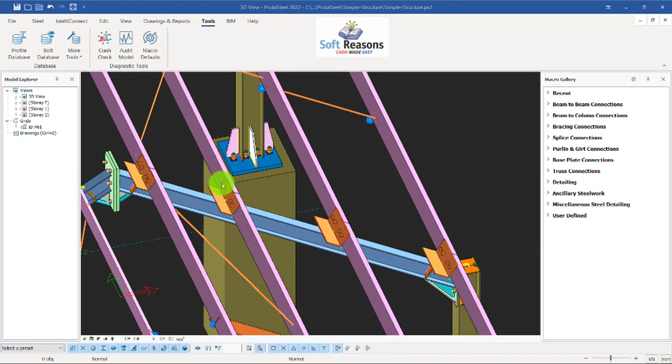So first, let's look at the purlin connections, the purlin itself, and the beam rafter. For instance, this one: you select the beam rafter first, or you can select any other member first. Hold the Control key to select multiple, which is the purlin coming from that direction, and this other purlin as well. You have to select the clip angle, which is the purlin connection, just like this.

The idea here is this: you find Clash under the Tools. Mind you, this is ProtaSteel 2022. After clicking on Clash, if any or all of these members are clashing together, they will remain red. They are not going to change back to their original color. But if none is clashing, they will return to their original color.

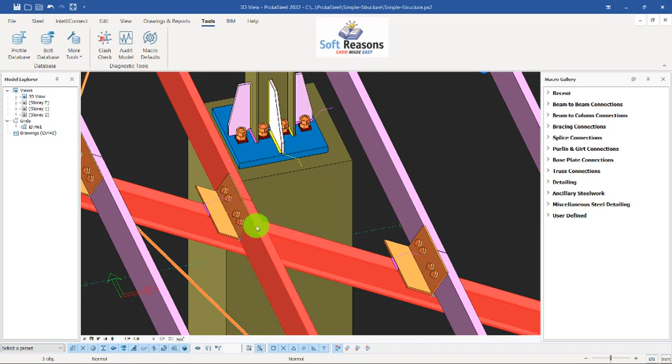So having selected it just like this, click on the clash check right there. You can now see that the beam rafter and these two purlins are actually clashing together. The clip angle, which is the purlin connection, is not clashing with the purlins, and it is not clashing with the beam rafter either. But the beam rafter and the purlins are clashing.

So let's do the same thing here. Highlight all of this. Let's check if this one is clashing. Click on Clash right there. You notice that none of this is clashing. Alright, so how do you resolve this clashing issue?

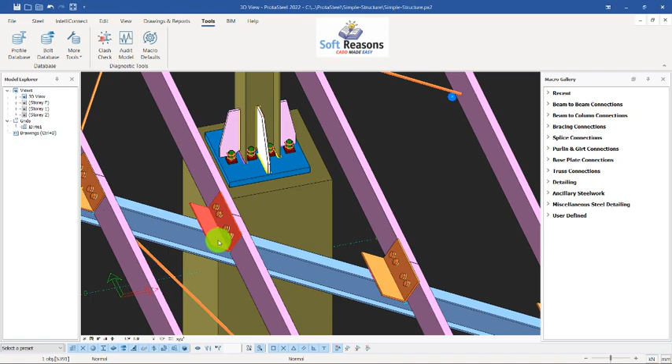If I select the clip angle and orbit it this way, and bring it closer, you can see that the purlins have entered inside the beam, which is what is causing the clashing. The purlin is actually touching the beam rafter right there. So you have to move this upward. The purlins have to be moved upward.

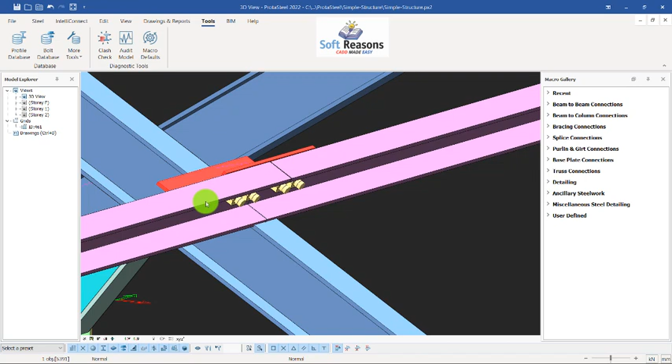So you select it and double click on it. In the dialog, you come to where you have the offset under out of plane. Select this provision and key in 20 millimeters. Click on Apply right there. You see it goes up just like this, meaning it is away from the beam rafter. Then click on OK.

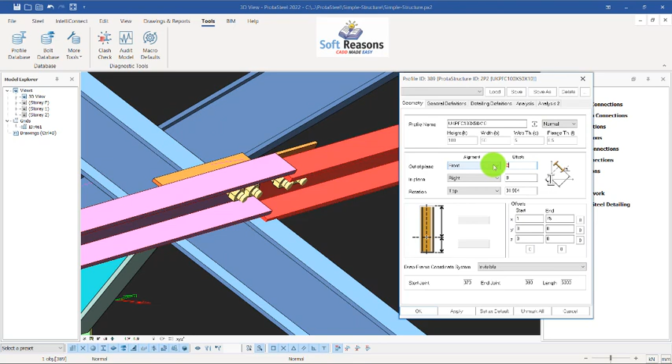You do the same thing here. Double click on it and then come over to this provision, the offset. You set it to 20 right here. Click on Apply and OK.

So now if I select this and orbit it around that point, you will notice that the purlin is no longer touching the beam rafter. So now if you select all of this and check for clashing again, you see it's no longer clashing. So we have resolved the clash issue.

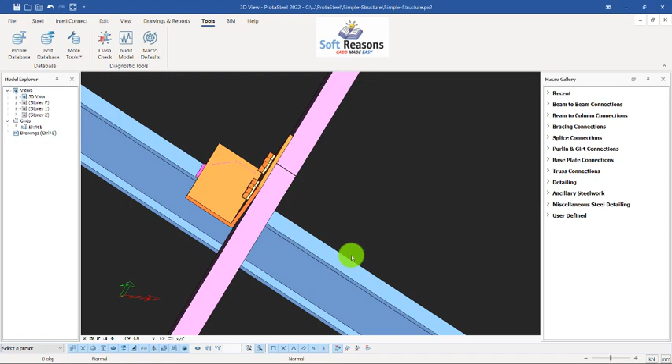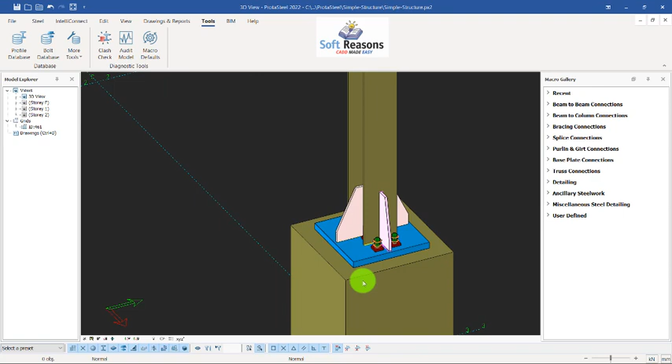The same thing is applicable to this base plate that you have here. You can also check whether the base plate is clashing with the columns and with the reinforced concrete members right there. If you highlight all of this, click on Clash, you notice none is clashing. So this is how you can check for clashing before you carry out your drawings in ProtaSteel.